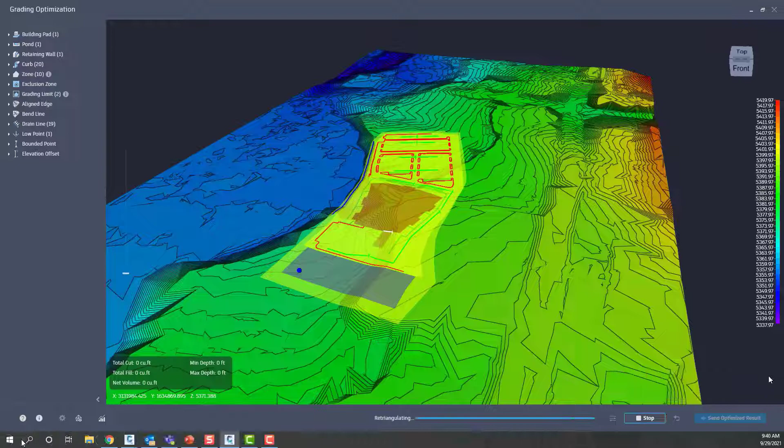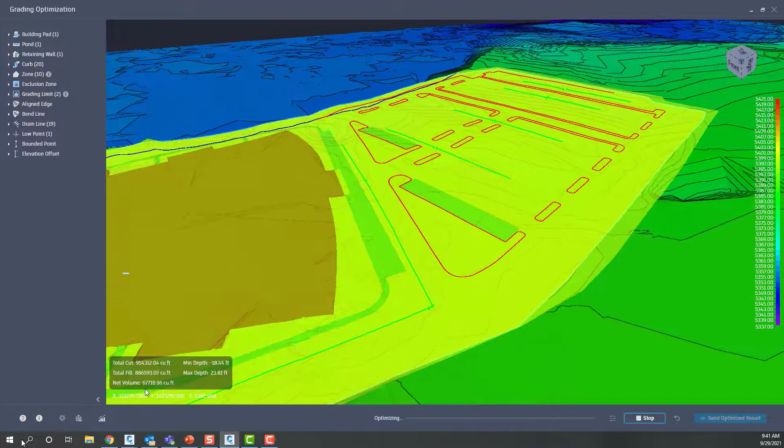So this is grading optimization. This is a video just to kind of see what it does. What this is, it's not generative design. It's optimized design. You actually go in and set different grading features in your drawing and kick it out to grading optimization. We've got our convergence plot that goes through the different iterations, and you can set it to run 25,000 to 100,000 different iterations of the design. We have different views inside of the grading optimization interface to show where we're violating slopes, where we can look at the TIN lines of the surface as it's being built, and you notice that it's being optimized. The longer you let it run, the better the result is going to be.

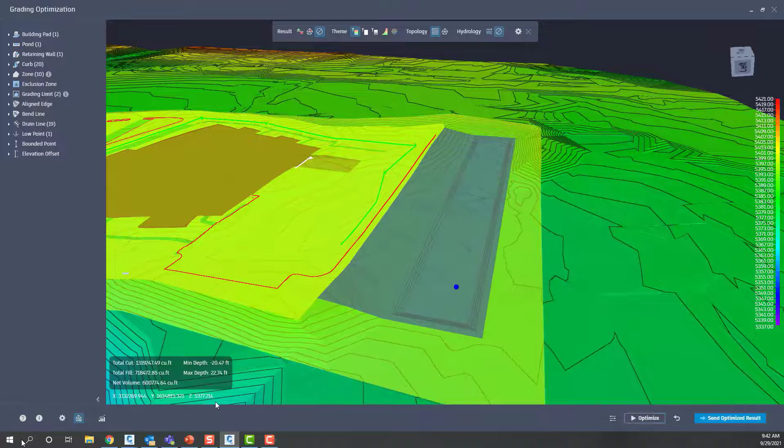So grading optimization, what is it? I just kind of went over that. It's a utility that you add into Civil 3D. It does take an additional install, and we'll go over where to get that. But what is it? How does it work? What do I get from it, and where do I get it from?

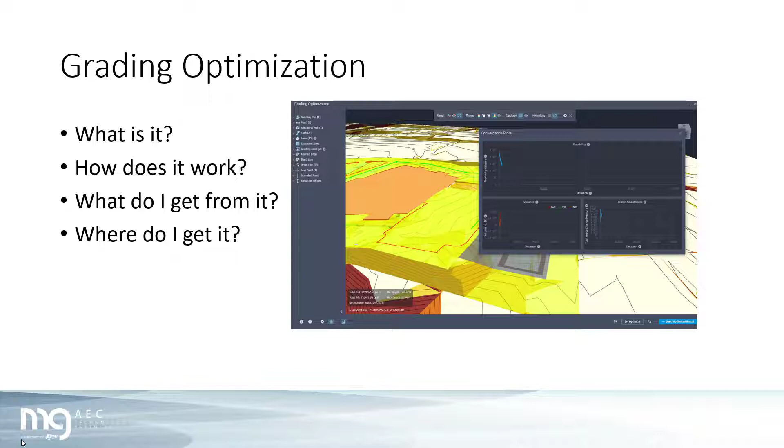So what is it? It's an alternative to historic grading methods. It's not generative design, but it's optimization. And then how does it work? So you lay out grading features with basic simple polylines. You draw your boundaries of areas, and we have in our grading objects browser a series of grading objects that we can identify through the use of tagging polylines.

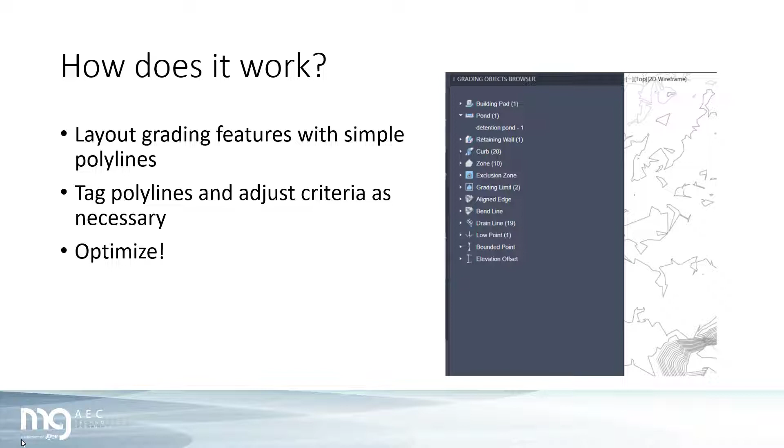And then each of these different items, from a building pad, a pond, retaining walls, so on and so forth, you can set the criteria for each of those individual items, and then you send it out to grading optimization to optimize. So what do you get once you optimize or use grading optimization?

So once optimized, you'll get an optimized surface, so a new surface definition that will be brought back into your Civil 3D drawing. You have the options of bringing in a series of feature lines. It will take those polylines that you've created and actually turn those into feature lines with elevation and PVIs and elevation points along those feature lines.

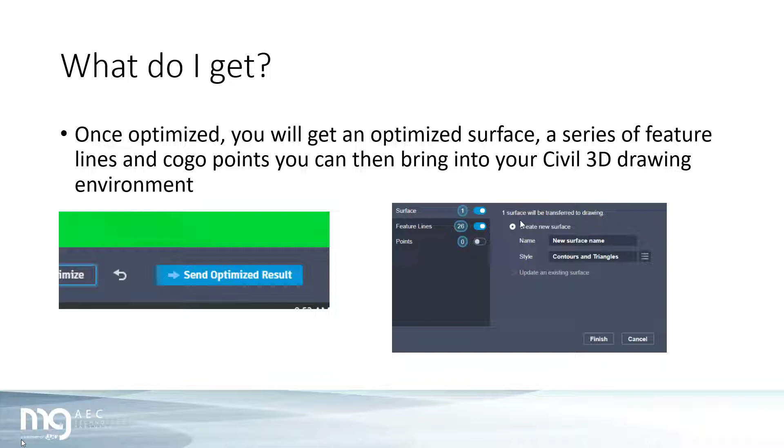And then you also have the option to bring in points. If you set a low point or a high point, it'll create COGO points that you can bring into your drawing as well. You have the ability to rename and select the style that you want that surface to land on, or you can have the option to update your existing surface.

So where do I get it? Grading optimization is an additional install for 2022. This is only available in the 2022 version of Civil 3D. Recently there was a 2022.1 update for Civil 3D. Grading optimization is compatible with that release as well. But you will need to go out to your Autodesk account under your manage.autodesk.com website, log in, and look at your available products. If you have the AEC collection, you can expand the AEC collection, and grading optimization is an option to install.

Now, grading optimization has had 2 updates to it. We've got 2022, 2022.1, and 2022.2 that just released. The 2022.2 release allows you to do retaining walls, which is a very beneficial thing to do in your typical site grading. So let's take a look at grading optimization.

Here I have a surface inside of this drawing, just has a surface definition in it. And just to illustrate how simple grading optimization works, I'm going to go to the Analyze tab of the ribbon, and on the far right of the Analyze tab, after installing grading optimization, you'll get a grading optimization panel. We've got grading objects, and then we've got our object browser, as well as our grading object tools that show up in our tool palette.

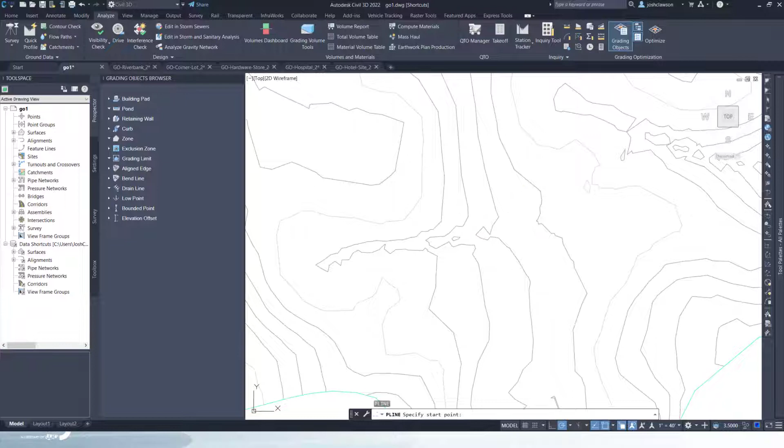So if I select the button for grading objects, we get our grading object browser, and these are the different types of items that we can identify, again, just through the use of polylines. And then in our tool palette, this is where we actually select what objects we want to be these various types of grading objects. On this site, I'm just going to draw a simple polyline. And we're going to make kind of a funny shaped pond.

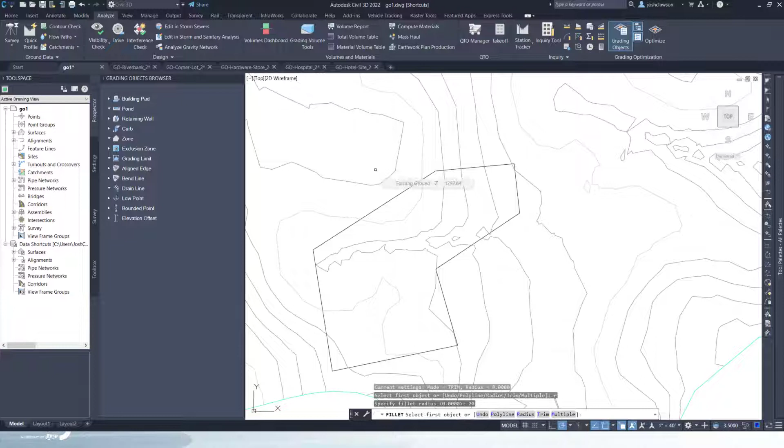I'm going to fillet this polyline, put a 20-foot radius on all of the vertex intersections. And I'm going to identify this as a pond. So in the tool palette, I have a pond object. So I'm going to select the pond object, and then I'm going to select my polyline that I want to turn into a pond, hit enter to accept my selection.

In the pond properties, you can see we have another panel that pops up. I can do a dry pond or I can do a wet pond, the difference being the safety bench criteria that you can populate. So we've got our berm, we've got different dimensions, different slopes that we can identify, and then our permanent pool as well.

I'm going to leave these as the defaults, but the one thing I want to show here is our volume is set to 30,000. I'm going to run grading optimization, and then we're going to come back and just change the volume and see what the results are. So I've got my pond set.

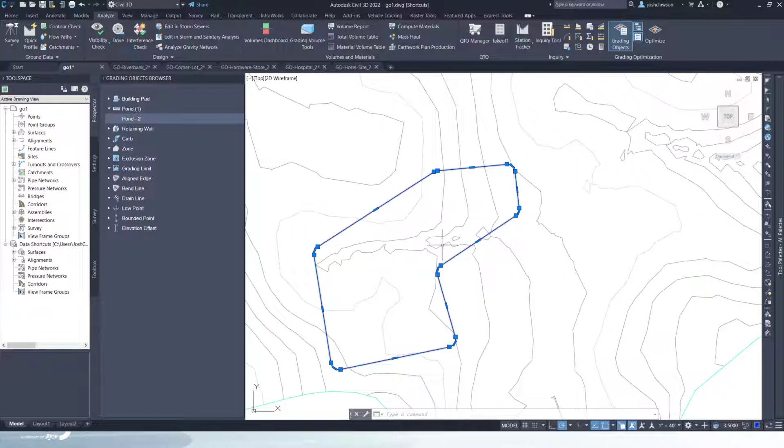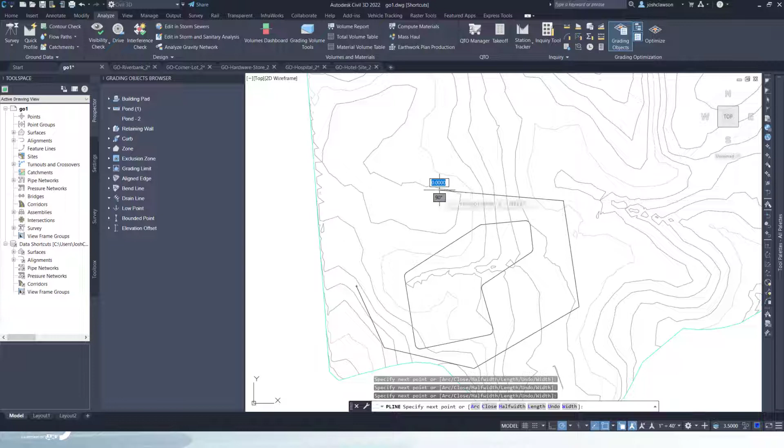Next, I need to identify my grading limits. With grading optimization, if I were to just identify that this is a pond and I run grading optimization, it's going to optimize my entire surface. So by setting grading limits, it allows me to only grade inside those grading limits. I'm going to draw another polyline just to identify my grading limits. Come back over to my tool palette and set my grading limits by that polyline.

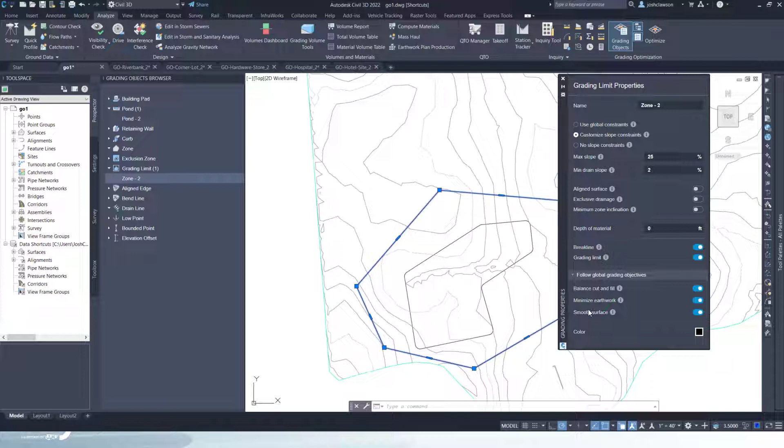We have some different slopes in here. I'm going to drop this one down to 25% for our max slope, our minimum drainage slope, depth of material. We want this to be a break line in the overall surface definition. Balance cut and fill, minimize earthwork, smooth surface. These are just all options. Then I'm going to change the color of this to red.

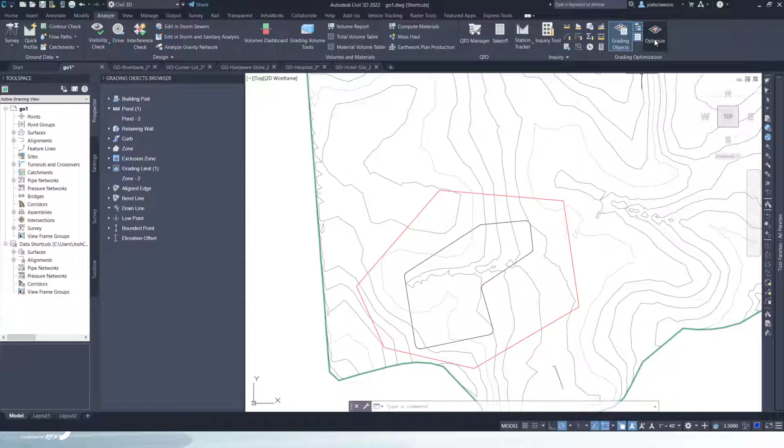So once I've got that criteria defined, I'm going to go ahead and launch grading optimization. Again, off the Analyze tab of the ribbon, grading optimization panel, we've got Optimize. This is going to launch the grading optimization interface, and we'll see that populate here.

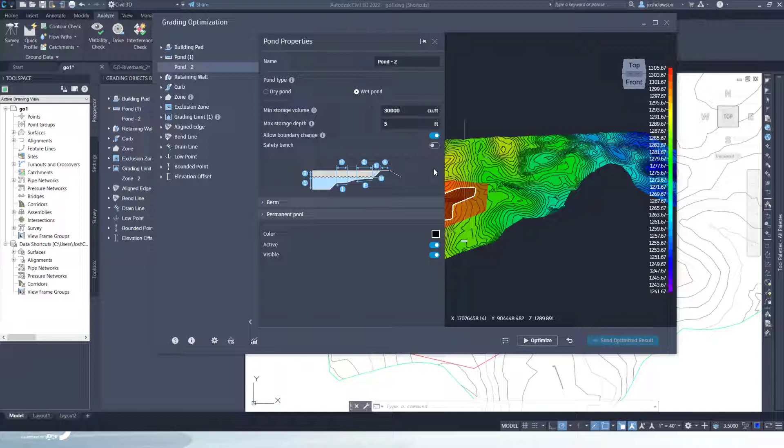Once grading optimization is open, we can take a look at what's going on inside of this interface. We can still access our pond criteria. We can still access our grading limit criteria. Essentially anything that you've identified as a grading object, you can come in and tweak the criteria inside the grading optimization interface. So we can see the entire existing ground surface, our grading limits, and our pond area.

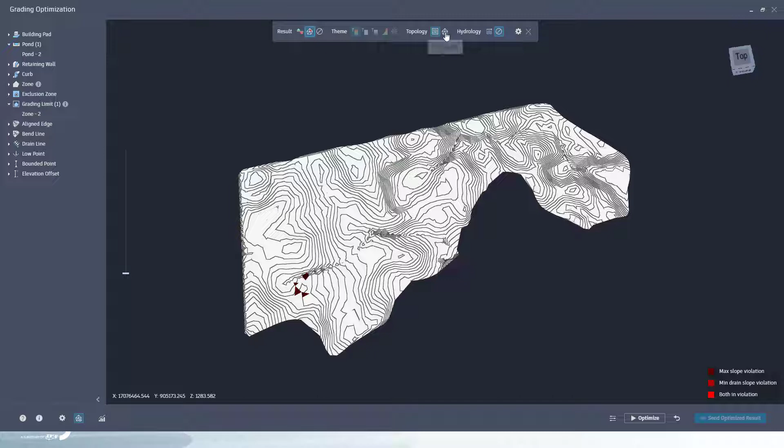I'm going to pull up the visualization toolbar so we can see what different visualization options we have. We can show cut and fill. We can see which areas are in violation of our criteria that has been predefined inside the grading objects in Civil 3D. You can view a wireframe. You can view contours. I'm just going to turn this off.

Down in the bottom right is the Optimize button. Once I select this button, we'll see these contours start to shift and change to abide by the criteria defined in the grading objects. I'm going to go ahead and hit Optimize. And then we have what's called a convergence plot that comes up.

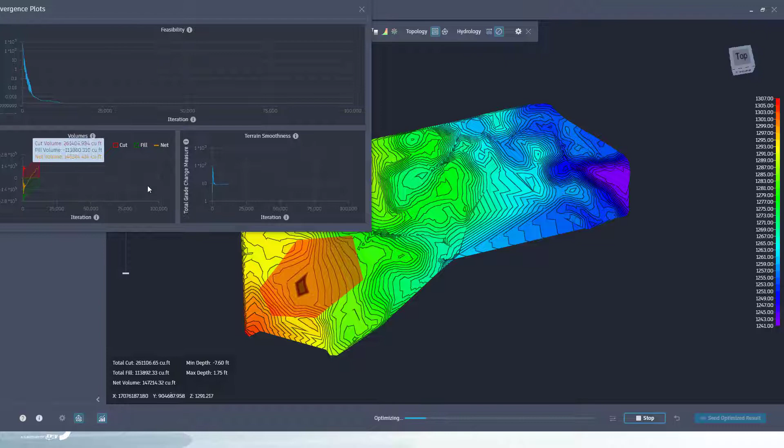What's happening is it's going through all these different iterations, and what we're looking for is this line to drop and then become more horizontal. Once it becomes more horizontal, our design has been optimized. And we can see those contours slightly changing here. We'll take a deeper look at this in some more complicated site layouts. I'm going to go ahead and close the convergence plot right now.

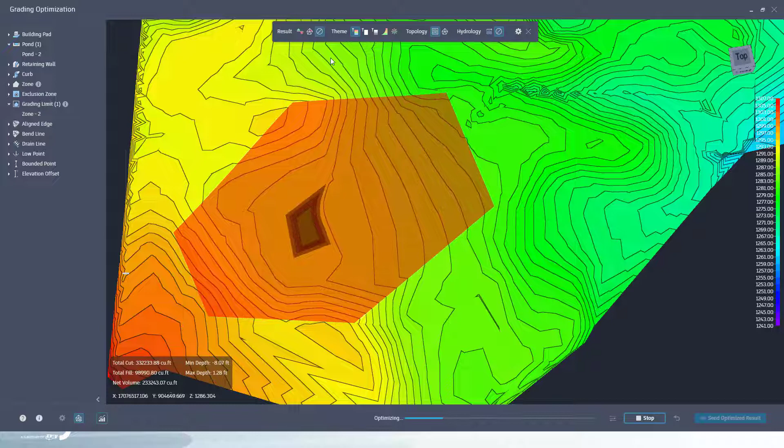We seem to have quickly optimized this pond, and again the geometry of the pond has changed slightly, and this is all dictated by the volume and the depth that we had defined. So it's taking that area and assigning the volume for the pond off of the shape that we had identified, and we can see that our cuts and fills are being calculated down at the bottom.

This is a rolling number because I have not stopped grading optimization, so total cut, total fill, and we're seeing that information. It's trying to balance it out. Now we can see the fill starting to grow, and so I'm going to go ahead and stop grading optimization.

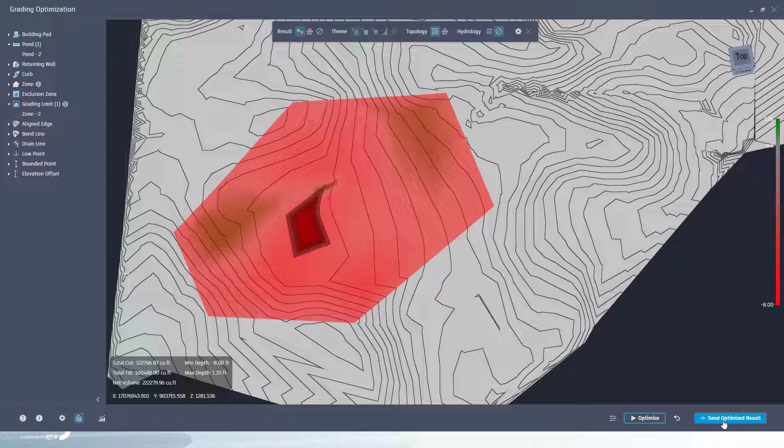In the bottom right, we have Send Optimized Results. This is going to kick this surface back into Civil 3D, populate a new surface definition in our drawing, as well as if we have items identified that create feature lines or COGO points, we have the option to send those into Civil 3D as well.

So I've got 4 different feature lines. I've got a surface, and I can create that surface. I'm just going to say PR pond 1, and then the style is going to read what styles are available in our current drawing.

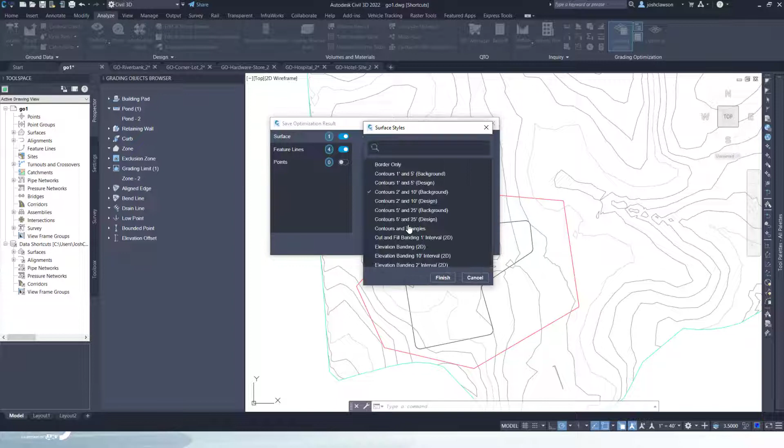I'm just going to go 1 and 5 design, and then say finish, and we'll see that information populate inside of Civil 3D. So we can see what we did with our pond, the contours, the footprint of our pond, as well as the grading limits.

Now the geometry of this pond is based on the volume. So it took the footprint and the volume that was specified as 30,000 as what's being contained in the pond that was created. If we were to adjust that, we could re-optimize and get a different result. So I've got a couple other drawings here where they're a bit more complex, to where all of the criteria has already been set in place. We'll go through and explore what that looks like and then optimize those different sites.

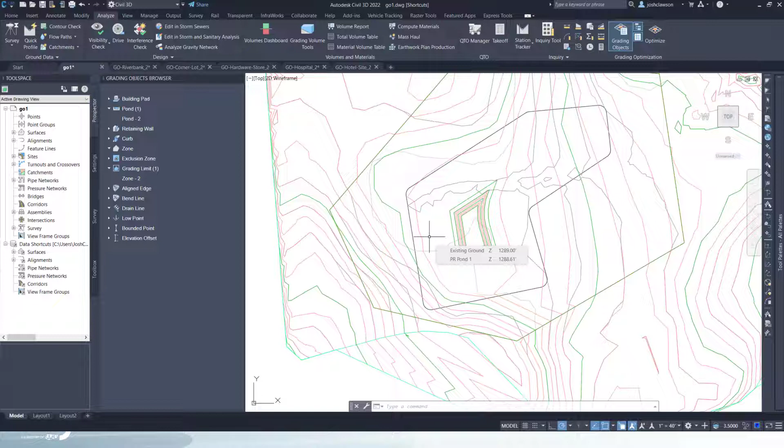So next I have a riverbank site, and if we look at the grading objects and what is inside of the grading object browser, we've got a grading pad, so these are different zones, and then we've got a hinge area, we've got our grading limits defined, and then we've got a drain line out here to where we're going to run drainage. So those are the only 3 items that are defined in this particular site.

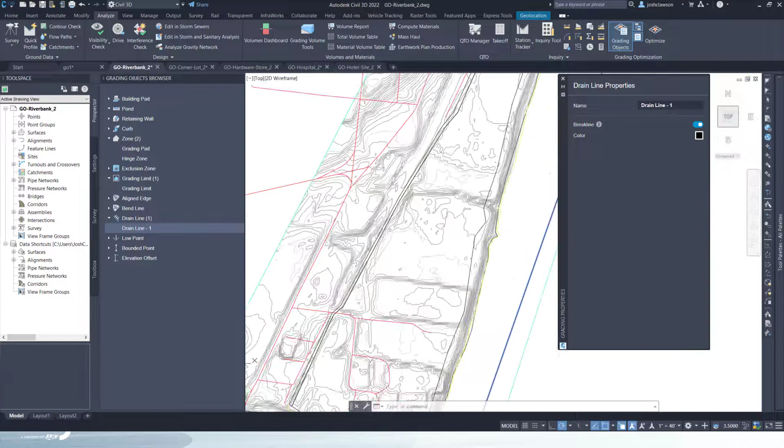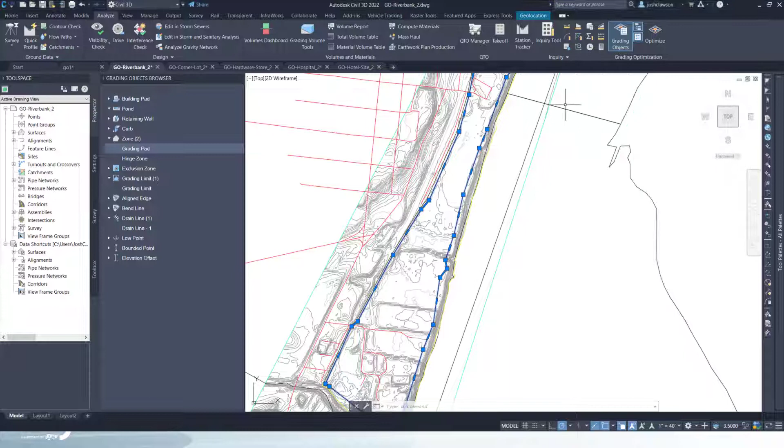But as we optimize this, we'll see this area completely flatten out where we've got all these different contours, because that is one of our zones that we want to grade. And taking a look at that zone, we can see the various criteria. So our max slope is 5%, our minimum slope is 1%. So we should see a result of a very flat area through here. Let's go ahead and kick this out to grading optimization. And we'll see what happens.

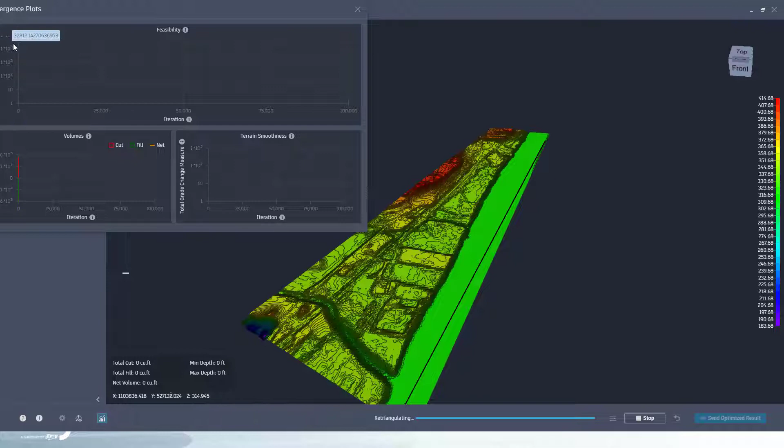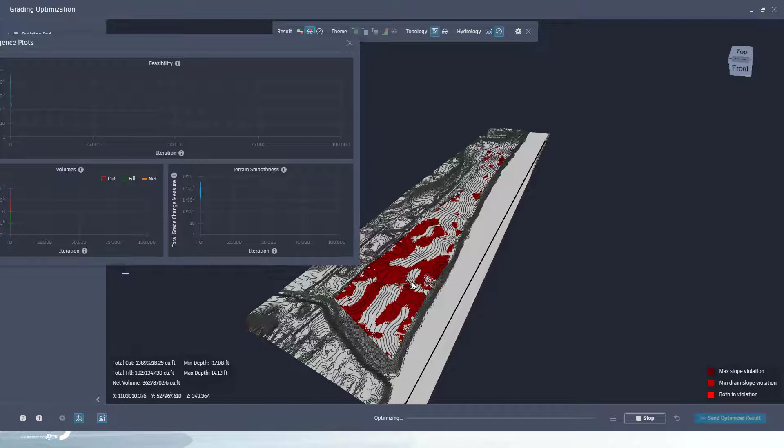I'm going to pull up the convergence plot right away, just so we can see what is happening as I hit optimize. So I'm going to select optimize, and we will watch this convergence plot start to take effect. And we can see that vertical line, and we can see our contours starting to flatten out in that area where we're at a 5% and 1% dictated. By pulling up my visualizations, I'm going to select my areas that are in violation, and we can see those starting to reduce as grading optimization is being allowed to continue to run. I'm going to speed this up.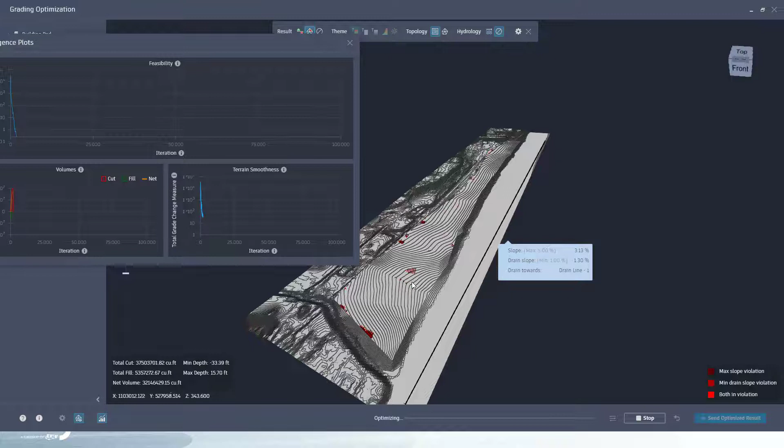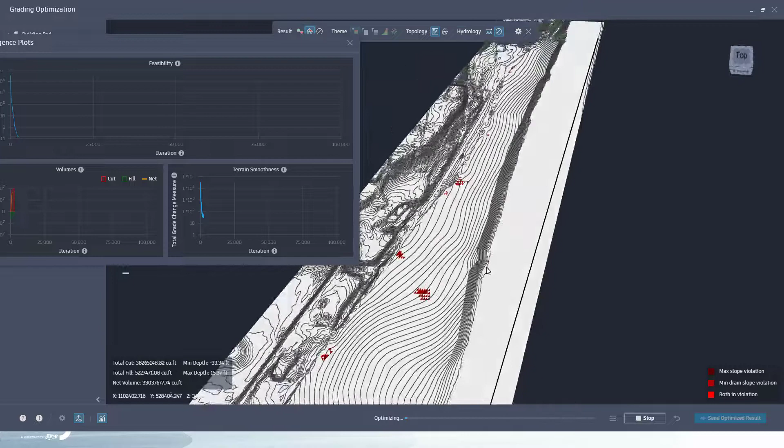Now we can see as this is continuing to optimize, those violation areas have greatly been reduced, and we would let it run longer to fully eliminate all of those areas of violation. But you can see how much smoother our grading area is and the result. I'm going to go ahead and stop this one. Let's look at a different scenario. I'm going to go ahead and close out of grading optimization and hop into a different drawing.

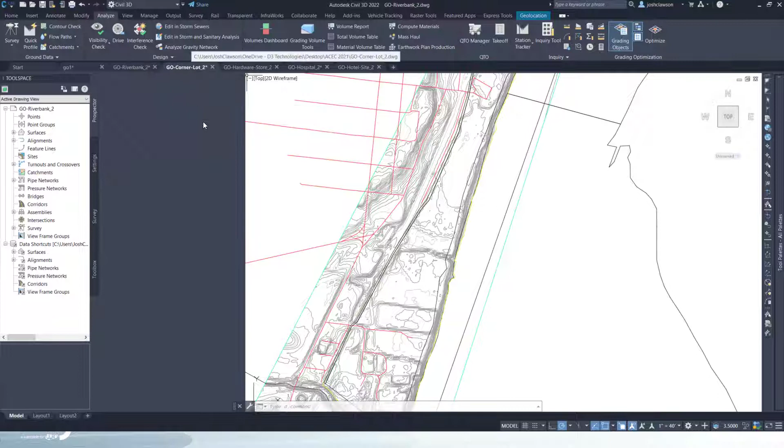So here's just a simple corner lot. Let's look at the types of objects that have been defined in this particular site. We've got a bunch of different zones. Now each of these zones has a different constraint. So we have a no minimum drainage slope on our green space. We have a max slope of 20%. Getting into our sidewalks, we can see our minimum drain and our max slope. Parking lot, sidewalk parking west, similar sidewalk west, road, parking lot itself, sidewalk south, sidewalk parking north.

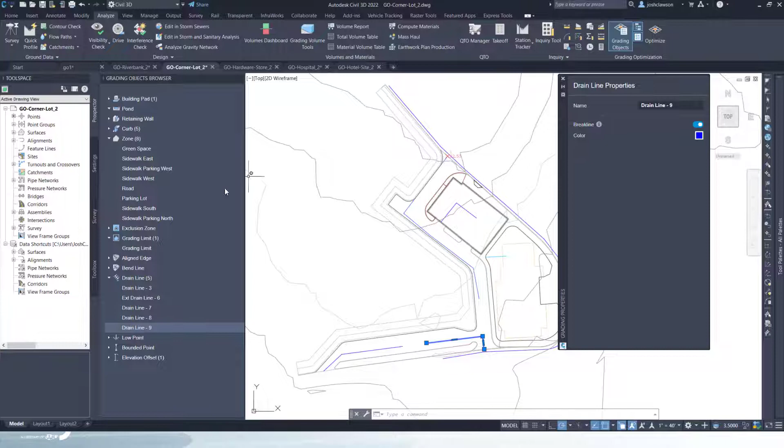We also have grading limits defined. And then in this particular one, we have these different drain lines. Now, these drain lines are identified by a polyline, and the direction that you draw that polyline dictates which way that water is going to drain. Once we get into grading optimization, you'll notice the little arrows on the drain lines as to which way we want that water to flow. So let's optimize this site.

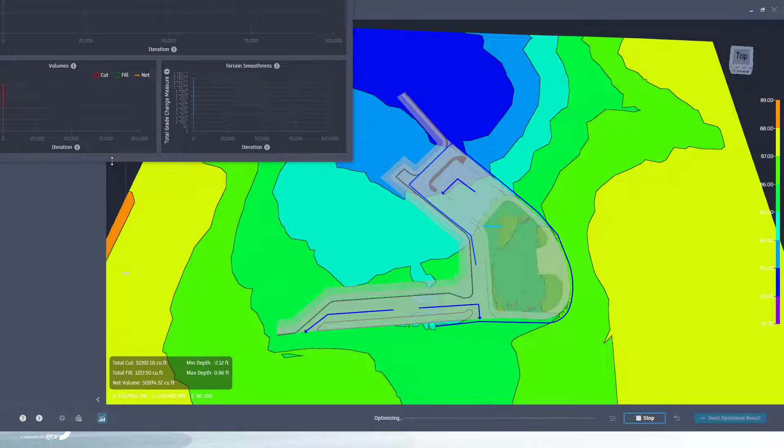You can tell just by looking at this that the contours are much flatter. We're in a less relief area, but I'll go ahead and optimize, and then I'm going to open up my convergence plot so you can kind of see what's going on. And here are those arrows I was talking about on those drain lines. I'm going to speed this up so we can see what's happening.

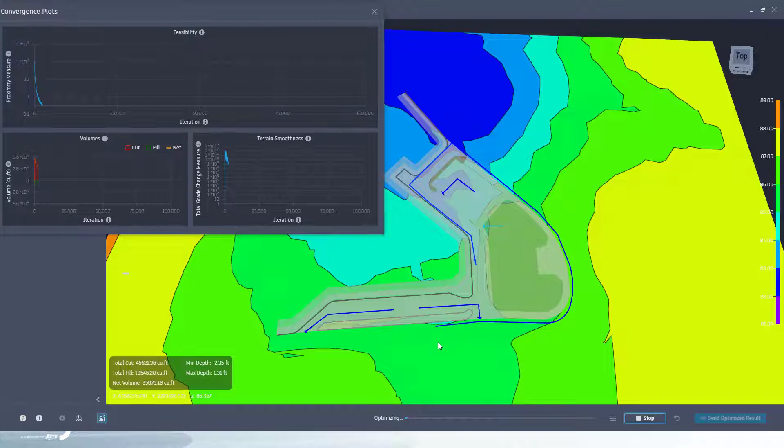And that's probably enough for this example. I'm going to go ahead and hit stop, and I'm going to send these optimized results back to Civil 3D. And we can leave this as contours and triangles. I'm not going to rename the surface. I'm just going to hit finish. But notice we have 26 feature lines coming in with this particular one.

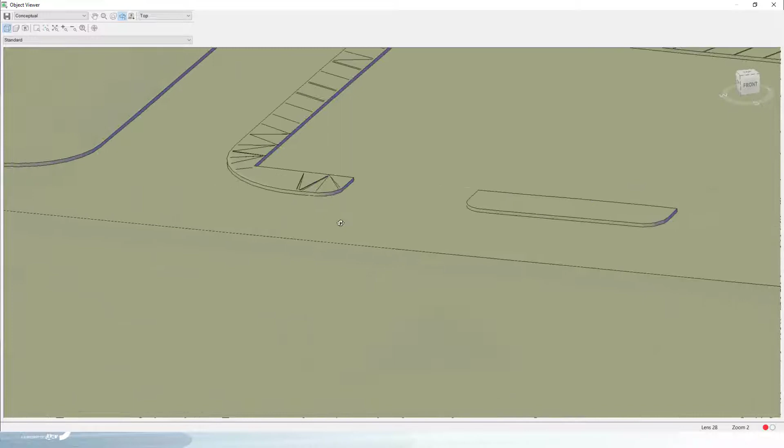And if we select that surface and go into Object Viewer, we can see how we've affected this. So we've got a pretty nice looking grading surface in here. Those curb and gutter lines are nice. Different medians, sidewalks, building pad, green space, things of that nature turn out really well.

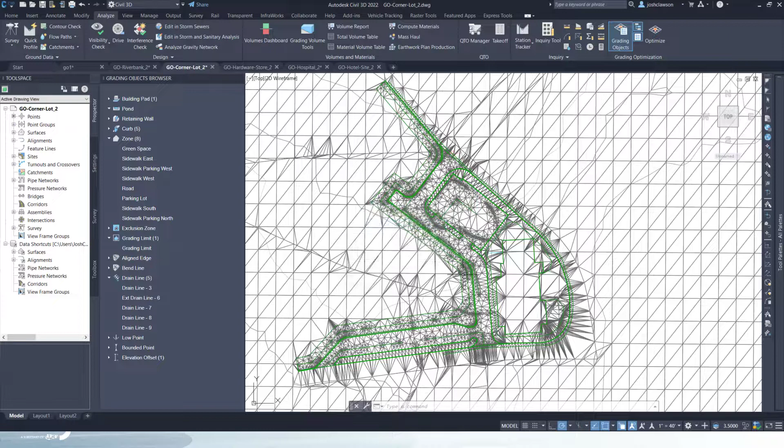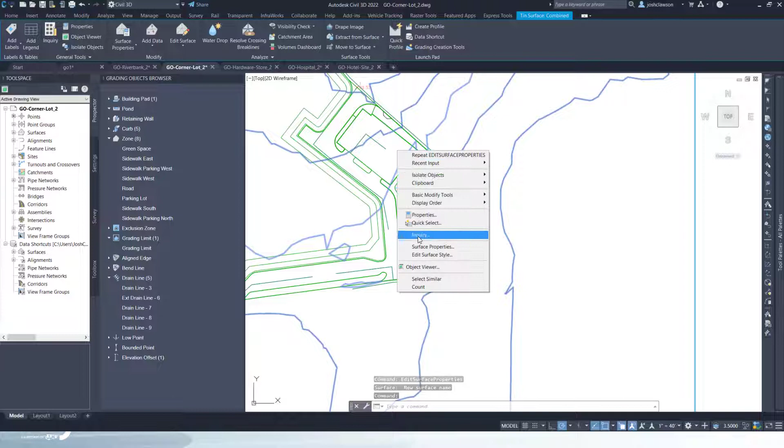Another item I would like to compare is the original existing ground. So if we grab that original existing ground, and I'll just go into Object Viewer on this one as well, to show what we started with, and then you all saw that result. Pretty neat tool. Changes the way that you think about grading. It's putting criteria in first instead of defining.

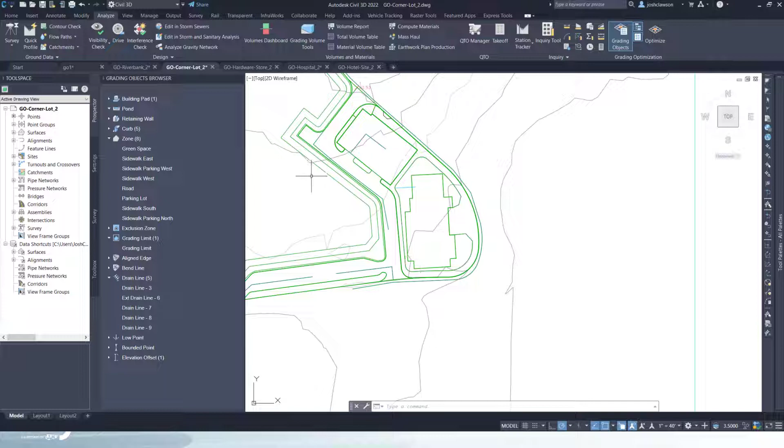So next we'll look at a hospital site. Now this one is quite complex. We've got various items in here from building pads to parking lots, sidewalks, roadways, ponds. And if I look at my grading objects to see what I've got in here, we've got quite a few different zones defined, different handicap areas,

pond outlines, but we do have a detention pond defined with a maximum storage volume of 25,000. We've got different grading limits defined, and then we've got quite a few drain lines defined in here. So let's see what this one does. So I'm going to jump out to grading optimization once again.

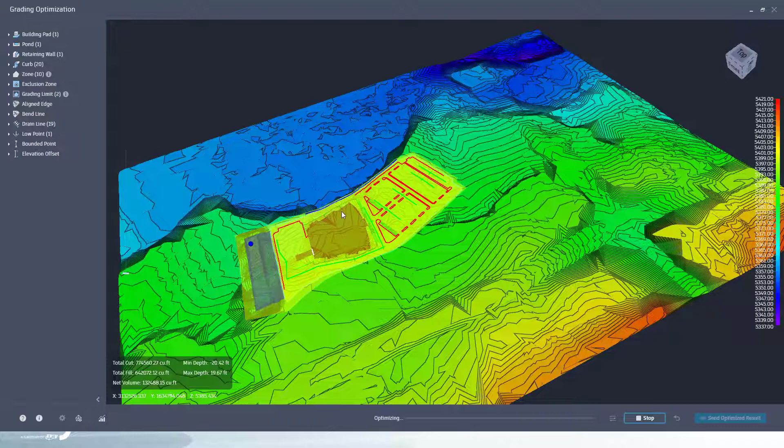So you can see our site as it currently sits with our polylines defined as grading objects. And let's go ahead and run that grading optimization. I'm going to select Optimize. And we see the magic begin to happen. Pond is being formed over here. Got a large building pad being flattened out, parking lot areas being defined.

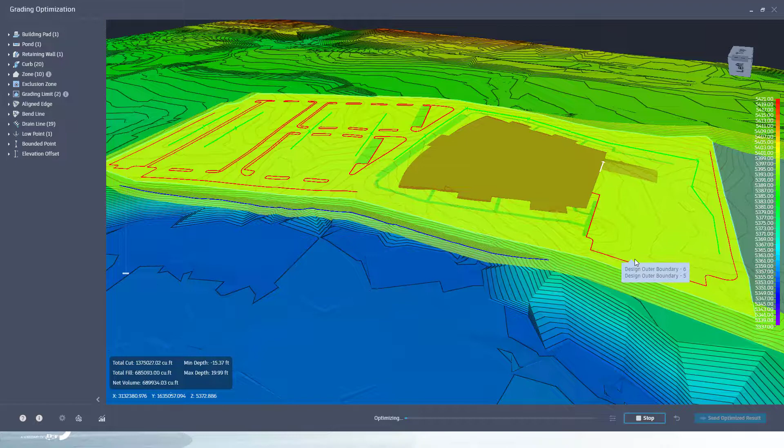We'll zoom in. It's really amazing. You can watch all of this happen, but I'll speed this up as well. And I'm going to go ahead and stop this. We can see that area has been greatly optimized. Quite an amazing tool, but just showing a more complex site and how that optimization can work.

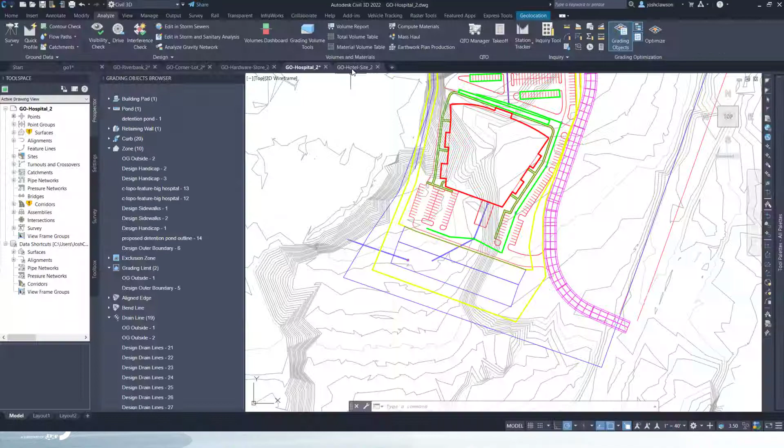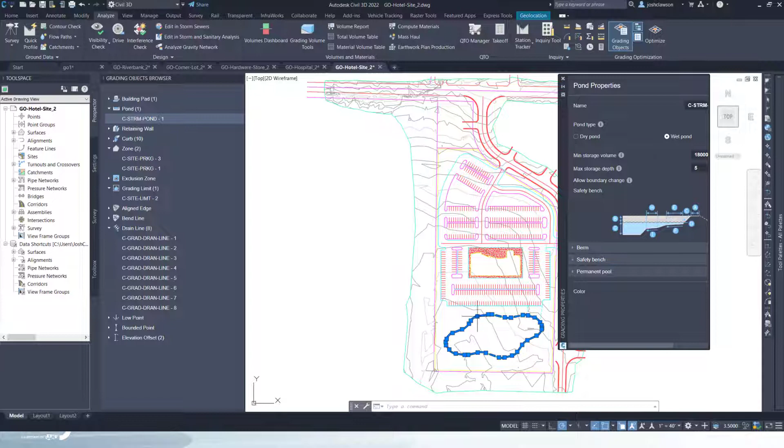I've got one more real quick to show you guys, and then we'll get into the Q&A portion of this. This is a hotel site. Again, let's take a look at what we've got for our different grading objects that have been identified. The storm pond is one that I just keep an eye on as we optimize it. It's pretty amazing how this tool works. So let's kick it out to grading optimization.

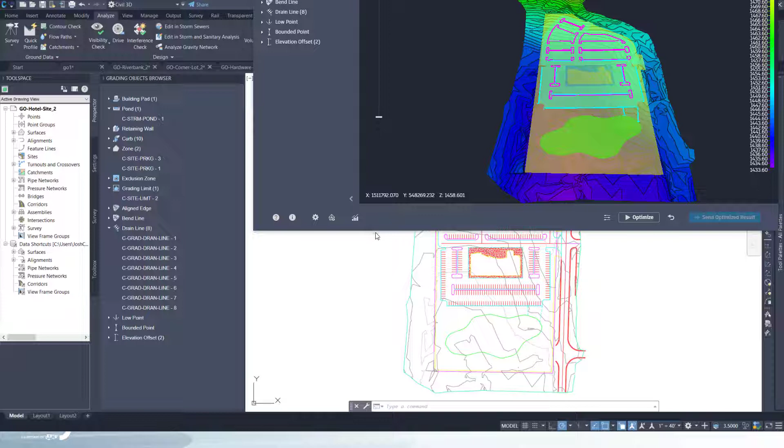And I'm going to just orbit this slightly, so we can kind of watch what's going on. I'm going to pull up the convergence plots and hit optimize.

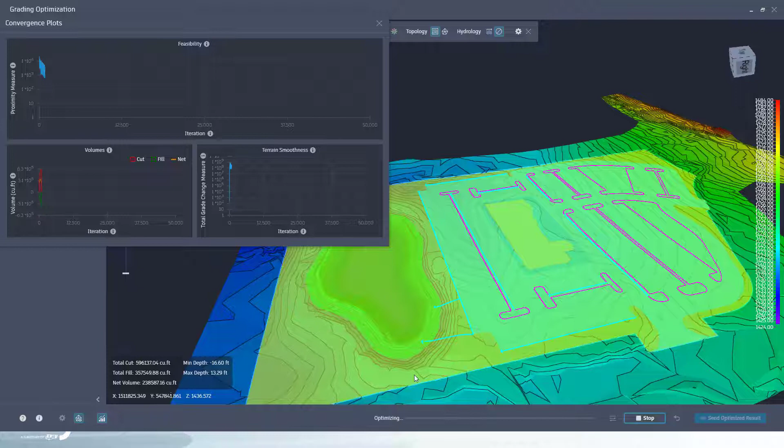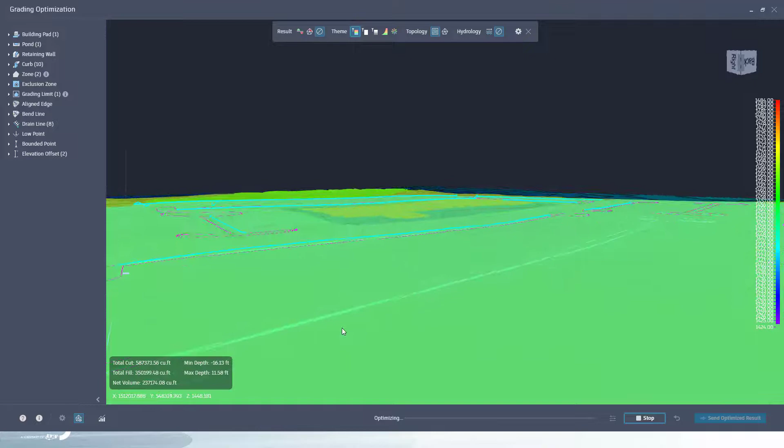And as you can see, the entire site has been graded out from the existing conditions into providing the pond, the building pad, different drainage lines, parking lot, curbs. Just a really neat tool, something that I definitely encourage all of you to explore. If you have access to subscription-based licensing, you should have access to Civil 3D 2022 and be able to start exploring grading optimization.

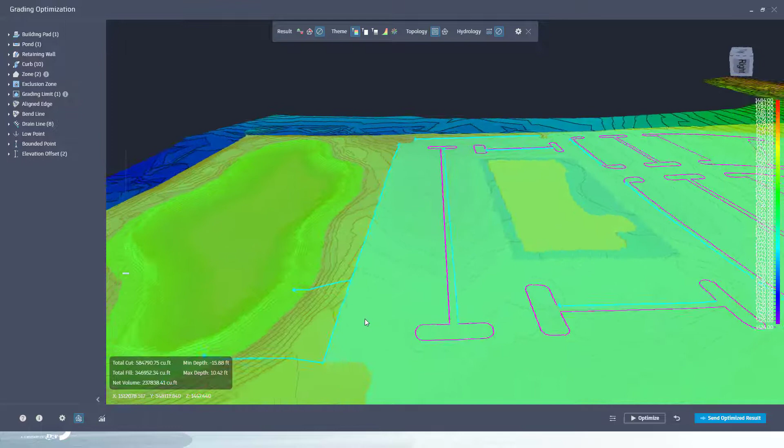All right. So in review, grading optimization is available in 2022 Civil 3D as an additional download. You can get that download from your manage.autodesk account, and install it. The 2022.2 release allows for retaining wall objects, which is very beneficial to be able to show those retaining walls. Polylines defined as grading entities, so we are not using feature lines and grading off of feature lines.

We are actually utilizing polylines and assigning a grading criteria to those polylines, and then we are running grading optimization off of those polyline entities with the criteria bases assigned to them. You launch grading optimization, run your optimization, and then you can send that information back to your Civil 3D drawing.

Another thing I forgot to mention is that you can run multiple iterations of grading optimization. So you can run your grading optimization and send it back to Civil 3D, review those results, and then you can send it back to grading optimization to produce a different surface and a different set of feature lines or COGO points to compare different design iterations. It's a pretty neat tool.

We're going to open this up for questions now, and let's see if we've got anything in there. Matt, I think you've been addressing the questions.